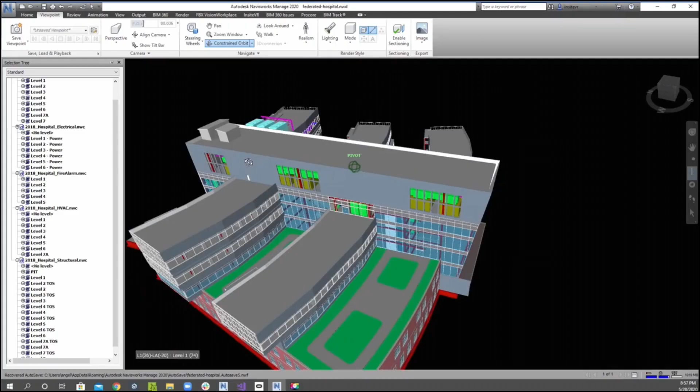So to kick things off, let's start with the first objective. I'm going to show you a brief demo of how Resolve works. It's powered by the Oculus Quest, which is the device you see on the screen there. It's a standalone headset, and you can bring in your Navisworks or Revit models, or any of the 70 different file formats that BIM 360 accepts, into a collaborative virtual environment.

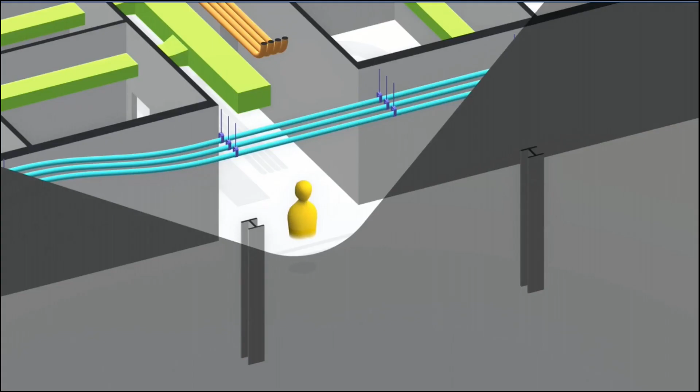Once you host your model on BIM 360, all it takes is a click of a button like you see on the screen, and you can bring that model into a collaborative environment like you see here. Under the hood, we have a new engine that allows you to stream in data from these large models into a standalone device. Then you have access to tools like properties, dollhouse mode, sketching, and measuring, and most importantly, you can be in there with your colleagues, even if they're halfway around the globe, or with a client who is in a completely different time zone.

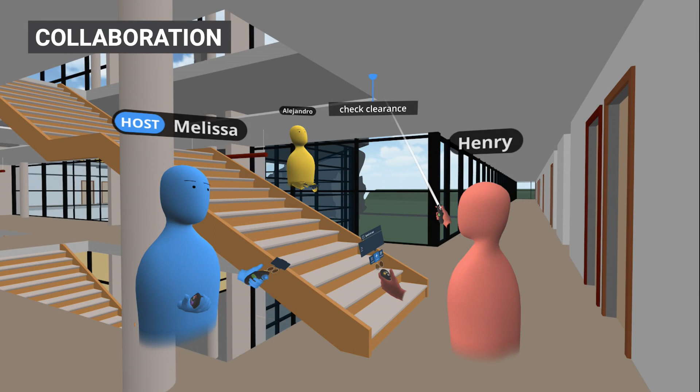Now I want to cover a couple of the key features. Again, I want to emphasize collaboration. When you put on your headset and enter the Resolve environment, you're going to see the other people in the project as avatars, and they don't have to be in the same room as you.

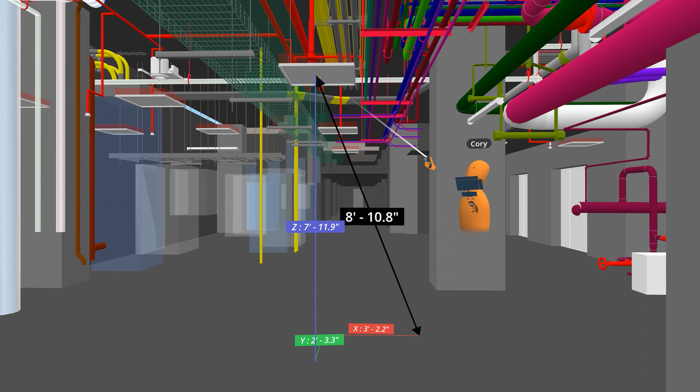We also have the ability to mark up the model using our sketching tools like you see here, and you can sketch in 3D, so you can do more advanced sketches than what you can do on a 2D screen. You have access to measurement tools as well, and the measurement tool looks very similar to what you may already be used to working with in Navisworks. It's going to show you the shortest distance between two points, as well as all the perpendicular distances.

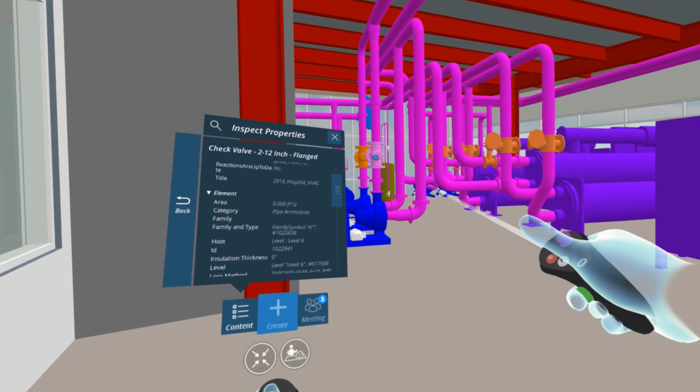I've also got BIM properties, and these all come into the collaborative VR environment, so if there's an element I'm unsure of, I can click on it to get more information, and all the data from Revit or Navisworks will show up in my VR menu.

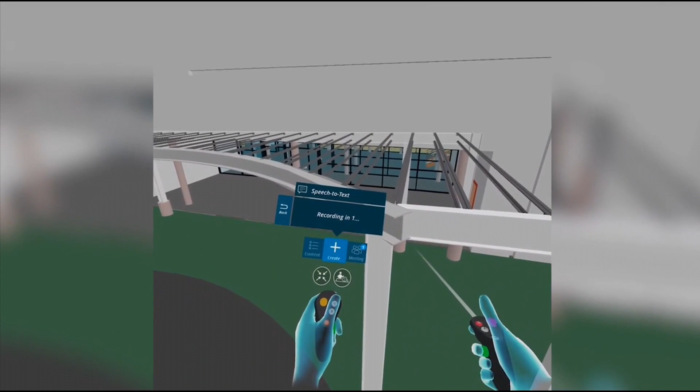Now I'm going to show you a video of how we connect with BIM 360 and the Autodesk Construction Cloud to produce a full circle workflow where we can follow up on issues after a VR meeting. In this video, I put on my Oculus Quest, and then I jump into a Revit model. I spot an issue here that I want to call out, so I use Resolve's speech-to-text annotations to say something out loud, like, let's review this with the structural team, and then the microphone picks that up, and Resolve will transcribe it.

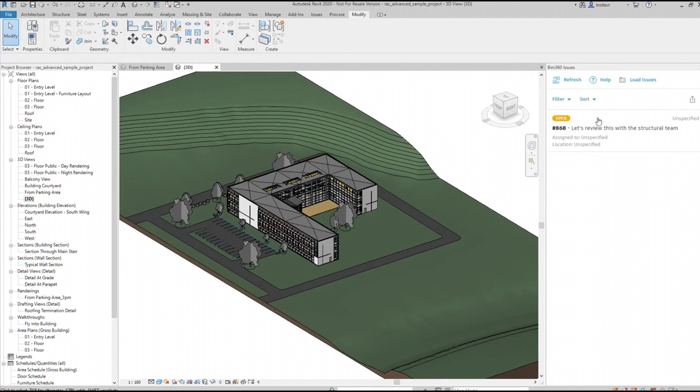I'll tag the item in question, and I've done this all from within VR, just using my voice and hands. But when I'm outside of the VR meeting, I can now open up Revit, and with the BIM 360 issues integration, I can go right to the issue that I left in VR directly in my modeling package. This also works in Navisworks as well, using the same issues integration.

So now, stakeholders like architecture, engineers, construction, operations and maintenance are part of a connected workflow, and so it's much easier to add VR to your existing process.

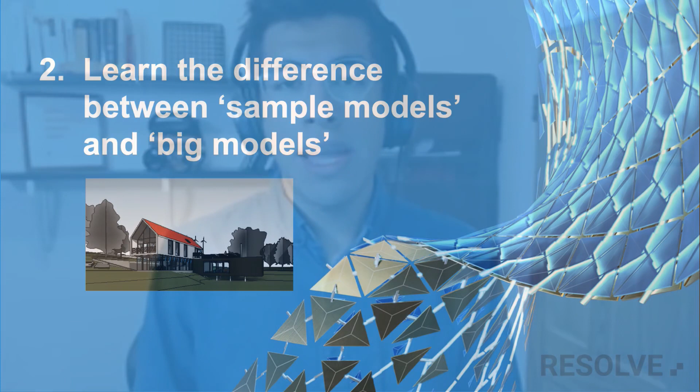So now let's dive into how we took the AU 2019 demo and turned it into an application that's capable of handling very large models in VR. So let's dive into this journey.

You might be familiar with the development workflow that starts with testing something on your local computer, and it works just fine with your sample data. And then you start giving it to more people on your team, and warnings start to crop up, but nothing's breaking just yet. And then you start handing it to more people, and that's when things start going a little haywire. And then finally, you ship to production, everybody gets their hands on it, and everything starts to explode.

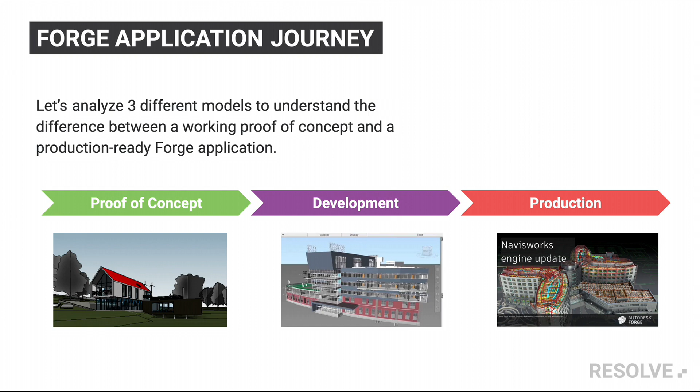Something very similar can happen when you're working with BIM data. So to understand the journey that we went through, we're going to look at 3 different types of models, starting with your proof of concept model, which for most people is this Revit sample project, and then a slightly larger model that you might use through development, and finally a large campus or a stadium that is the type of model that you'll receive in production.

And to understand where things start to break, we're going to look at a few components of a model. The first is triangles. Next we'll look at fragments, which is just a collection of triangles, and you use it to describe objects. The more fragments you have, the more draw calls you're going to have. This can put some strain on your CPU and your model viewer. Finally, we'll look at the properties bubble, which is a JSON file or SQLite database that has all of the building metadata, and these can get very big. The bigger they get, the slower they are to parse as well.

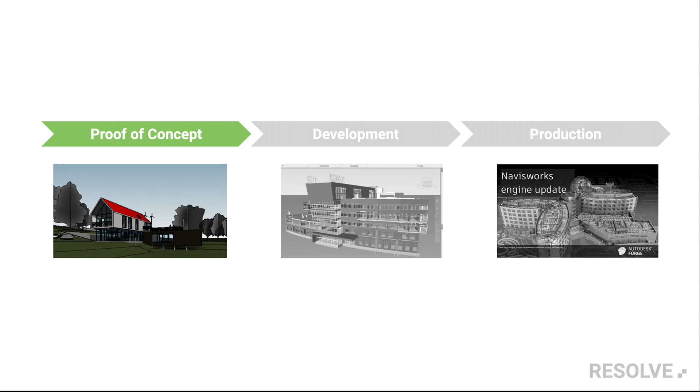So let's start by looking at a lightweight project. Let's take the Revit sample project, which I'm sure a lot of you have used. The Revit sample project has 400,000 triangles. That's not a lot, and we're still in the clear here with 2 gigabytes of RAM on the Oculus Quest, so we have plenty of breathing room. It has 777 fragments, which isn't a lot, but it's not quite negligible. But with some batching, we can take care of this.

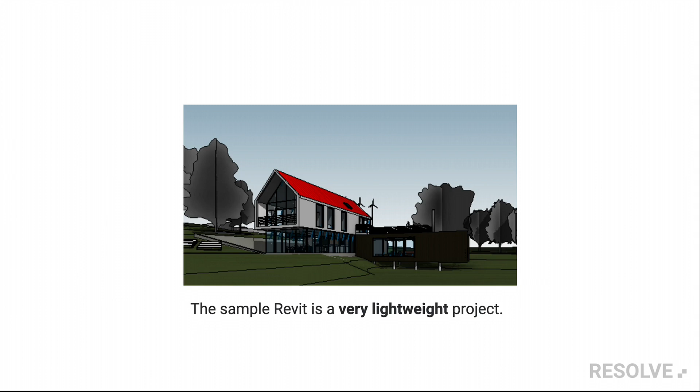The property bubble is about 0.2 megabytes. This is totally fine. It's a quick download, nothing to worry about. So this is the kind of project that you start developing your application with, and everything is fine and dandy, and you think it's working, but we have to keep in mind that the Revit Sample House is a very lightweight project. So let's crank it up a notch.

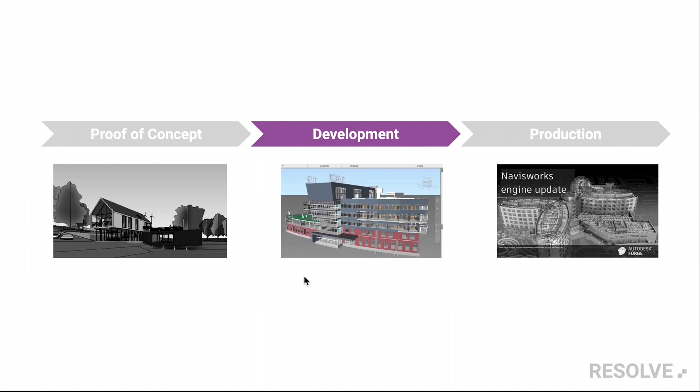Let's look at the middleweight type of project. This is a hospital model that's federated in Navisworks. It's got 9 million triangles in it. With 2 gigabytes of RAM, we're still fine. However, it has 95,000 fragments. So now we're getting to the point where you have to start worrying about how many draw calls you're sending to your GPU. The Quest can handle about 100 draw calls, so we have to reduce this by a factor of 1,000. So we're going to have to start to get clever here with what we're doing.

The property bubble is about 8.2 megabytes.

This should be a relatively quick download, but after decompressing, it can also take a while to parse. We're going to start to see some warnings pop up and hit some limits of our hardware. So what else can go wrong?

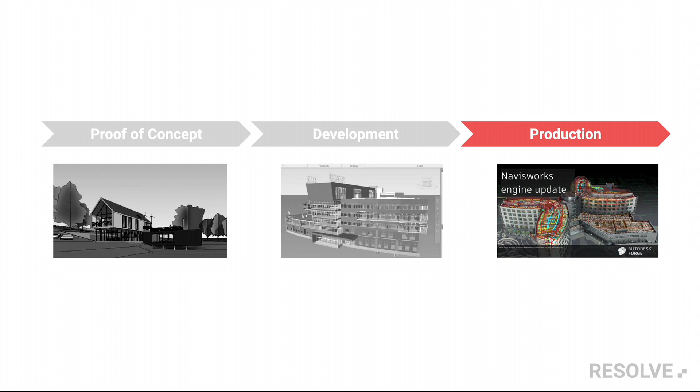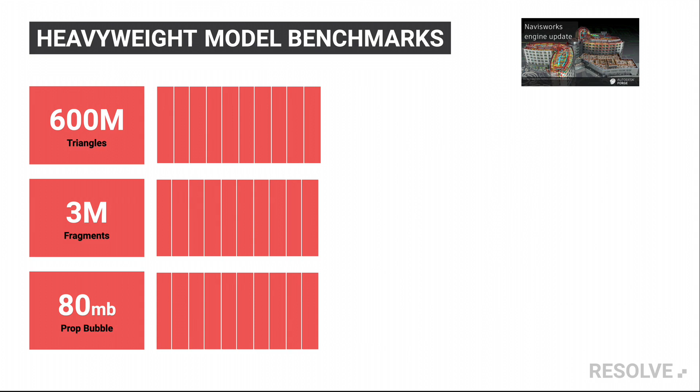A lot more. Let's take a look at the heavyweight project, which is this federated campus. In this model, we have 600 million triangles, 3 million fragments, and an 80 megabyte property bubble. This is when things start to blow up. With 600 million triangles, we are going to quickly run out of RAM. We need about 7 gigabytes, and we said earlier we only have 2.

So we're out of resources here. We have 3 million objects in our scene. If you try to load that up in an engine like Unity or Unreal, it's going to get unmanageable. Our property bubble is at 80 megabytes, which is a sizable download. When it expands, it's going to be impossible to parse. So now we've reached our limits. We've maxed out all the resources, and things will actually start to blow up.

Let's take a look at what happens. Your server starts to crash because some of this data is too big. Your customer's browser also starts to crash. You might have seen that WebGL symbol that says WebGL has crashed. That'll happen. Your mobile device won't be able to keep up, and we have to remember the Oculus Quest is basically a mobile device strapped to your face. If you're downloading this content over 4G or LTE, you're starting to consume a lot of your bandwidth.

And we also run into issues with Forge APIs, like the model derivative or property endpoints. They start to exhibit some strange behavior that could break your application. And here, Michael can explain more about what's going on. Right. Forge services, like the model derivative APIs, can start to show issues when dealing with large models too. And this happens in 3 areas: the file upload, file processing, and data querying.

With the first one, file upload, this is no longer an issue with the new resumable APIs, so let's skip that. Next is file processing. When processing large files, our servers need lots of RAM, but we have to guess that up front based on the file size, and we call this right sizing. When we guess it wrong, the process crashes and we retry again and again until it times out. And from the BIM 360 dashboard, it appears like it's still processing for hours, which is not great.

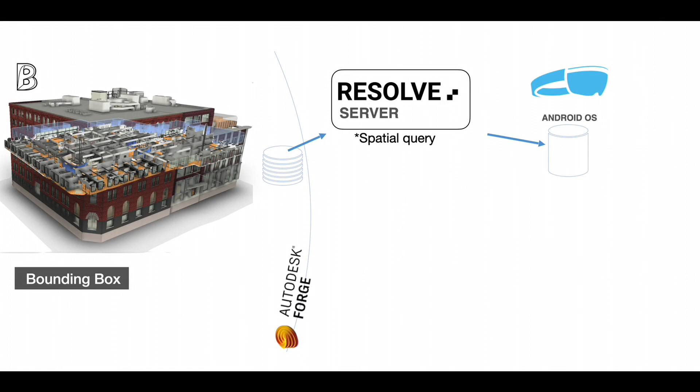So, how does Resolve leverage Forge to handle big models? Well, one way is to use the fragment list file from the derivative service as a spatial lookup table. Resolve uses this to transfer only a section of the building, not the whole building. However, version 1 relied on BIM 360 to select that region beforehand. In version 2, things changed. To tell us more, here's Angel.

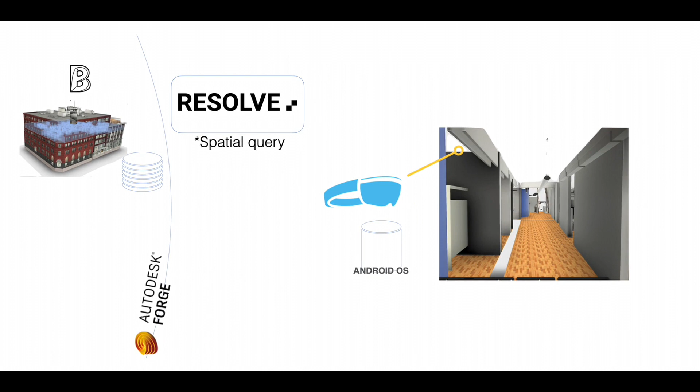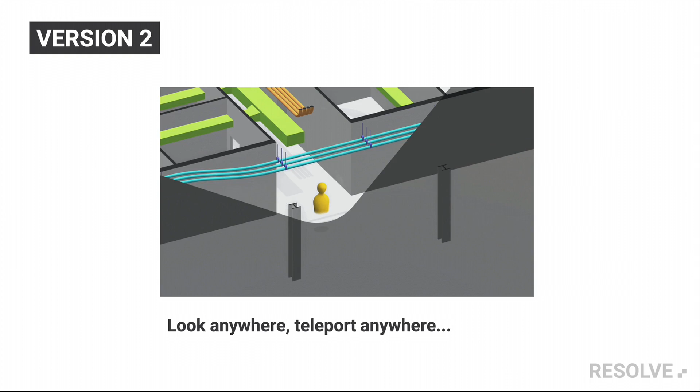So with the latest version of Resolve, we went back to the drawing board, and instead of having people choose areas they wanted to see and downsize their models from BIM 360, we wanted to figure out how can we do that for them. And so the loop that's playing on the screen gives you a bit of a look at what's going on in the background of Resolve. We're basically querying what you're looking at and where you're looking, and we use that information to just render what you need to see on the fly.

So instead of the user manually inputting from the BIM 360 viewer, it all happens in the background without you noticing, and the best part is it's all happening on the wireless Oculus Quest. So this has allowed us to handle really large files like the ones that we've talked about in this presentation, and all on the Oculus Quest.

Right now, we are the only collaborative VR platform that can open such complex BIM files on these wireless devices without having to section them ahead of time, because as I'm sure you all know, that can be very time consuming. So we've come a long way since what we presented at AU last year, and we want to thank you all for tuning into our talk.